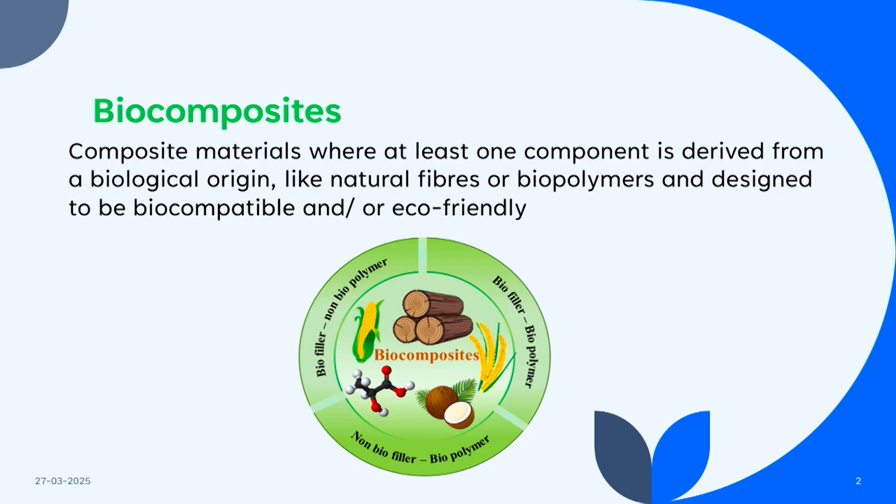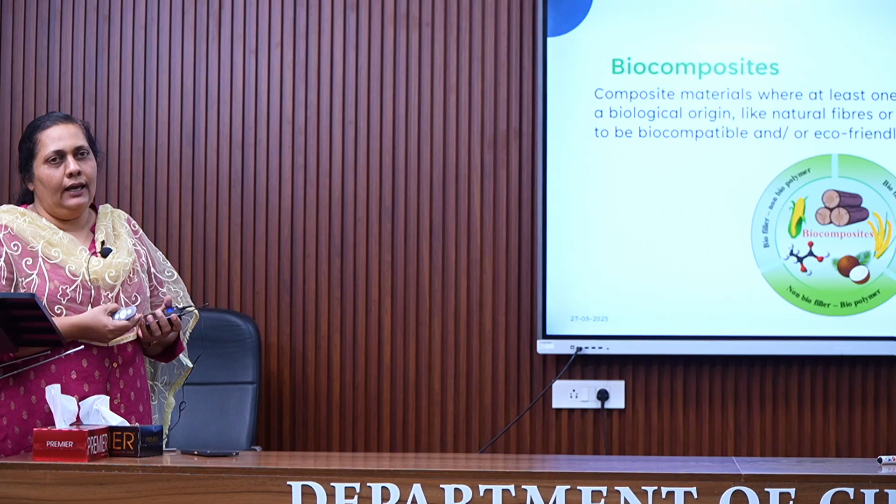This talk will be a general one, covering the basic things about adhesives and biocomposites. As you know, these days you were listening about biocomposites. Any composite material has a matrix as well as a fiber. So a biocomposite can be a biofiller and a non-biopolymer, or a biofiller and a biopolymer, or a non-biofiller and a biopolymer. So either the matrix should be of natural origin, or the fiber should be of natural origin.

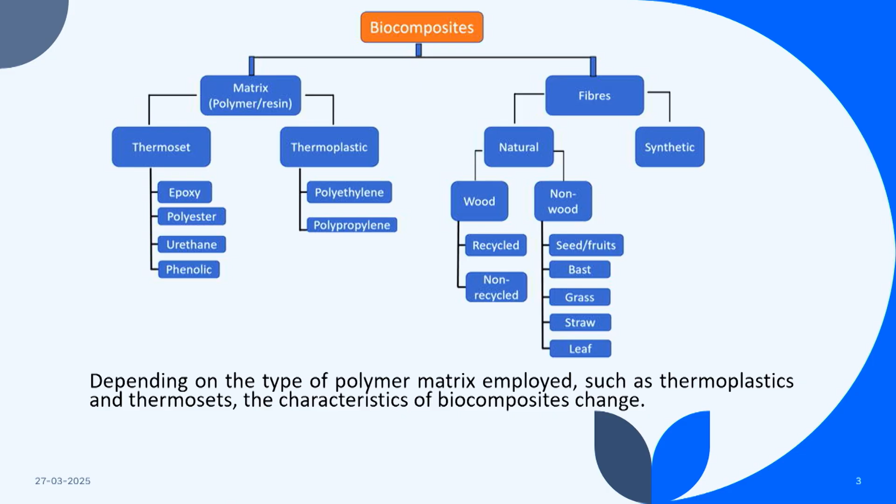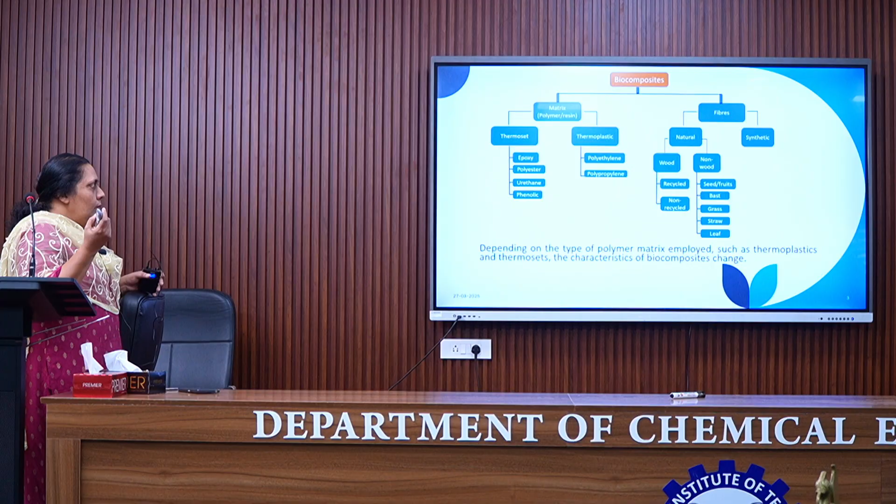Based on this general classification, biocomposites can be classified based on matrix into thermosets and thermoplastics. Thermosets include epoxy, polyester, urethane, phenolic resins, etc., while thermoplastics include polyethylene and polypropylene. Fibers can be either natural or synthetic; synthetic ones like nylon, polyester, etc., can also be used. All this broadly comes under biocomposites. Depending on the type of polymer matrix employed, such as thermosets or thermoplastics, the characteristics of the biocomposite will change.

So we have a biocomposite, and inside that a filler should be there. The filler has to be adhered properly to the matrix. So what is adhesion? Adhesion is the attraction process between dissimilar surfaces that cling to one another. The opposite is cohesion. Cohesion is when two similar materials cling, and adhesion means when two dissimilar surfaces cling together.

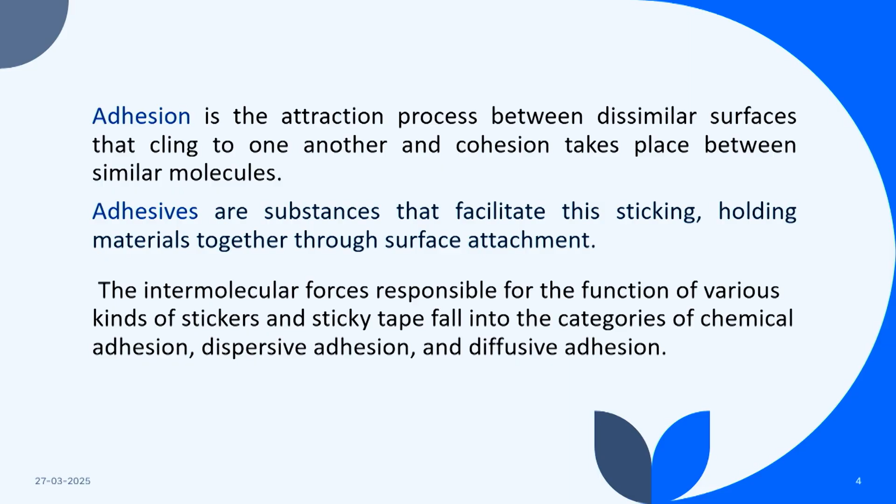Materials that show adhesion are known as adhesives, and adhesives are substances that facilitate sticking, holding materials together through surface attachment. The intermolecular forces responsible for the function of various kinds of stickers and sticky tape come under chemical adhesion, dispersive adhesion or diffusive adhesion. So there are different mechanisms by which these two materials will adhere together. We will see what the mechanisms of adhesion are.

The important theories of adhesion are physical adsorption, chemical bonding, diffusion theory, electrostatic theory, or mechanical interlocking. We will see each of them. Physical adsorption theory means there is contact between two materials on the surface, and van der Waals forces of attraction hold the adherend and the adhesive together. For these forces to develop and give good bonding, intimate molecular contact should be there between the adhesive and the adherend.

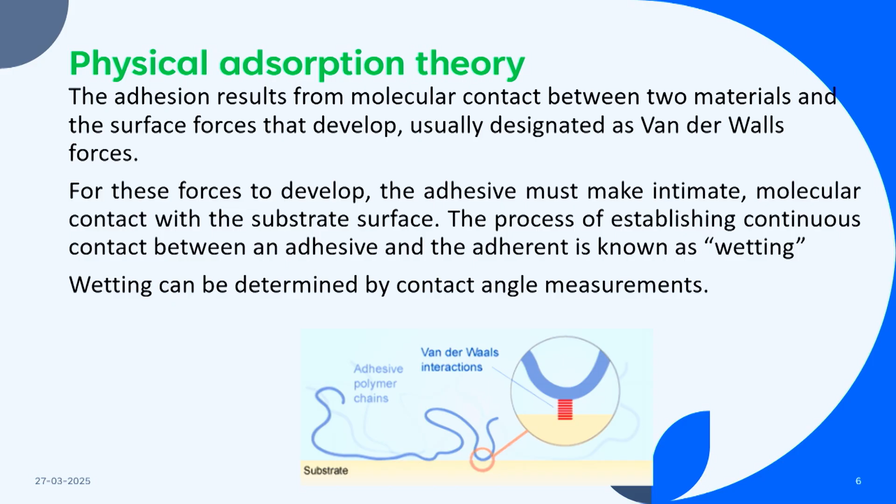That is, proper wetting should be there on the surface. Wetting can be determined by contact angle measurements. You can see here the adhesive chain shown by the blue line, and van der Waals interaction is happening at this interface. So that is physical adsorption. So wetting should be there.

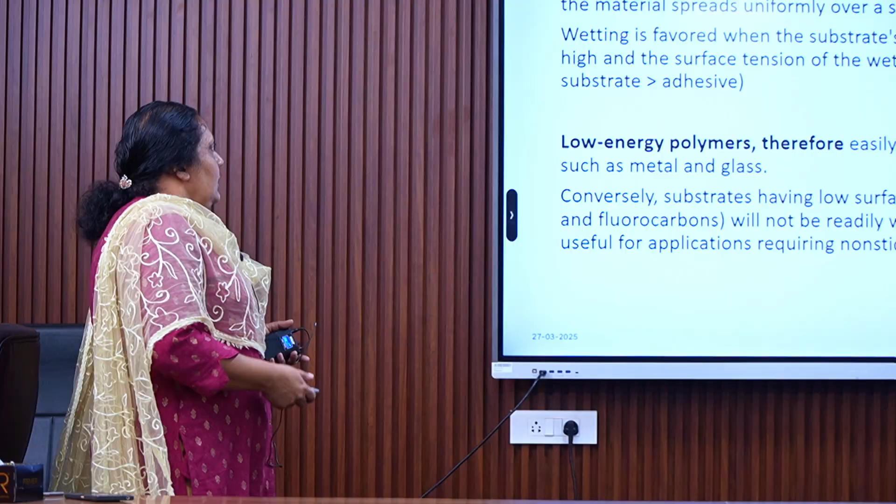So what is wetting? Complete spontaneous wetting occurs depending on the contact angle, which you may be familiar with. That is, when a drop of fluid falls on the surface, what angle it makes with the surface. When the contact angle is 0 degrees, the material will spread uniformly over the surface and form a thin sheet. That we call complete spontaneous wetting.

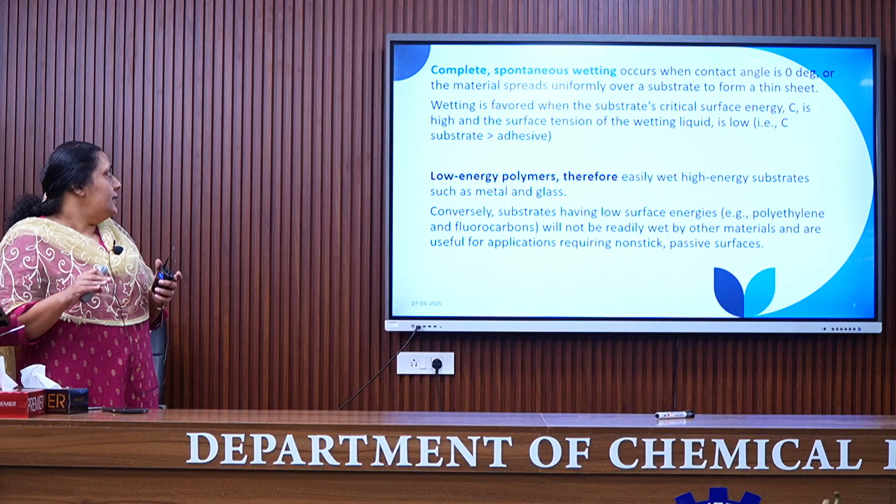So how is it possible? How can we have a 0 contact angle? When the substrate energy, that is the critical surface energy of the substrate, is high compared to the adhesive, that is compared to the surface tension of the wetting liquid, it favors the wetting process, that is, C of substrate should be greater than the C of adhesive.

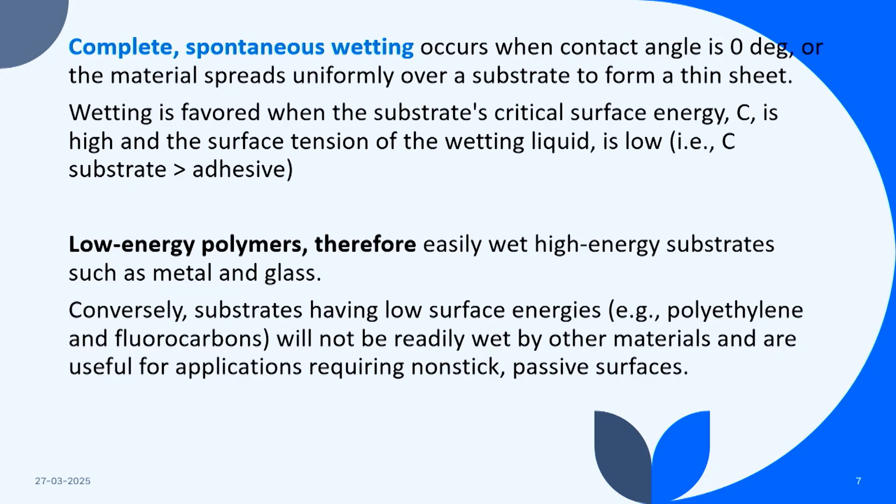So we can say that low energy polymers easily wet high energy substrates. If the substrate is having higher energy, the low energy polymers can wet it. But few substrates with low surface energy, like polyethylene or Teflon, fluorocarbons, etc., you know that material won't stick to them, because they are having low surface energy, and it is difficult for a higher energy thing to stick on it. So they will be primarily used for non-stick and passive surfaces. We call it as non-stick surface or passive surfaces. So in order to have a good wetting, the surface energy of the substrate should be higher.

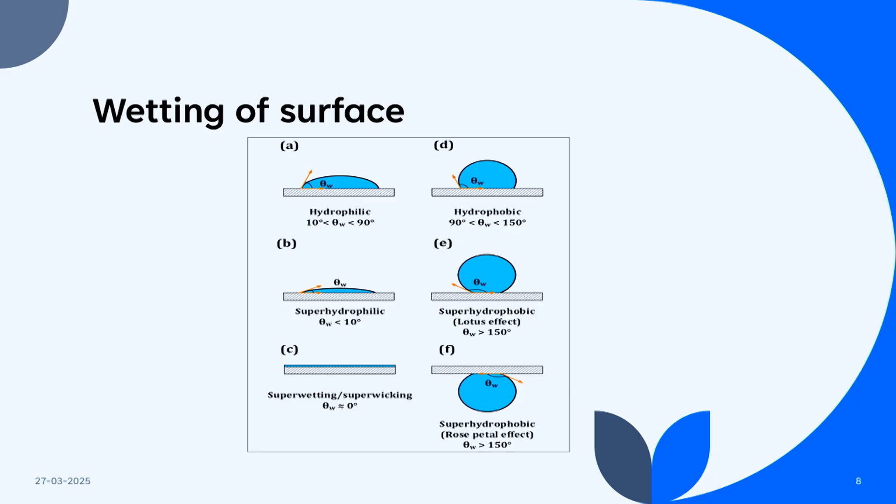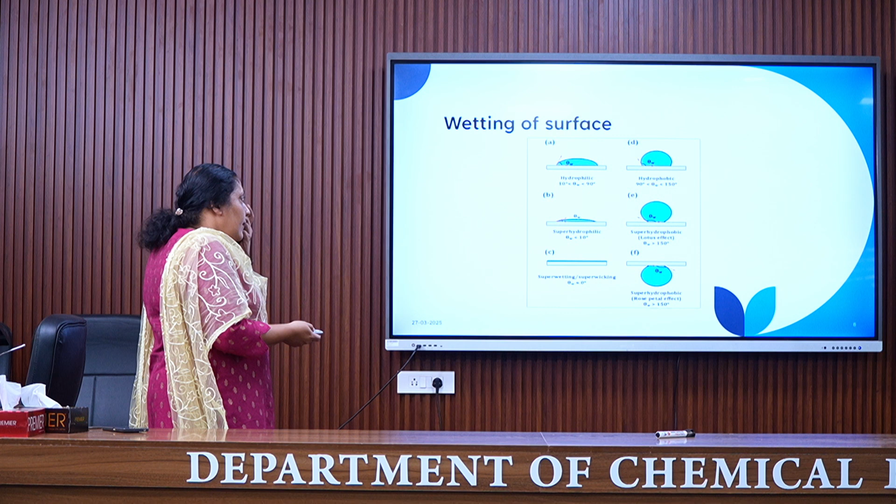So this will give you an idea of different types of wetting process. One is 0 wetting, that is super wetting or super wicking, where the contact angle is 0. Super hydrophilic is less than 10, then hydrophilic 10 to 90 degrees. And if the contact angle is between 90 to 150, hydrophobic, then super hydrophobic, rose petal effect and lotus effect. So this is how it is classified based on the contact angle, the nature of the surface.

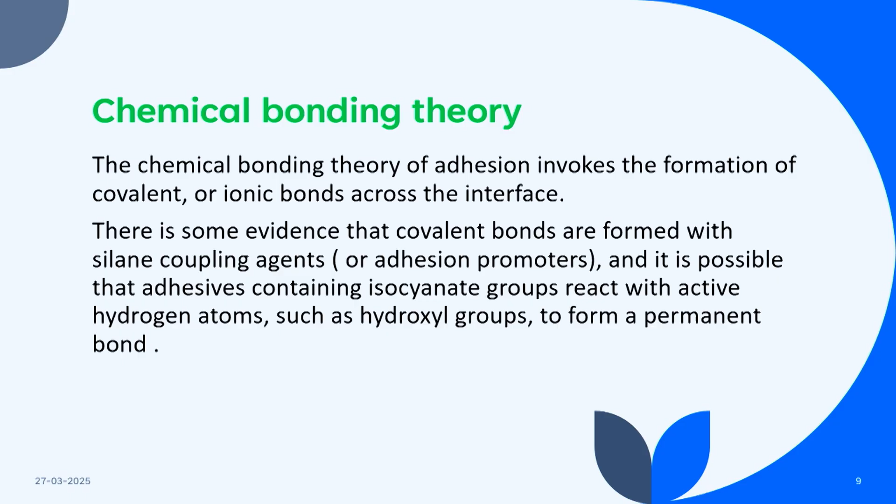So that is physical bonding. For physical bonding, a van der Waals force of attraction is required, and for that proper wetting of the surface is required. Second is chemical bonding theory. Chemical bonding theory states that an ionic bond or a covalent bond has to be formed between the adhesive and the adherent.

So we will add some silane coupling agents or adhesion promoters into the adhesive system so that it can react with the adherent and form a chemical bond between the adhesive and the adherent. Another example is some isocyanate groups can be there in the adhesive system, which can react with the hydroxyl groups present on the adherend surface. That gives a permanent bond.

Then the third one is diffusive adhesion. Diffusive adhesion means both the adherend and the adhesive should be mobile, and they should be soluble in each other. This would be particularly effective with polymer chains where one end of the molecule diffuses into the other material. That is, between adhesive and substrate, mutual interdiffusion should happen.

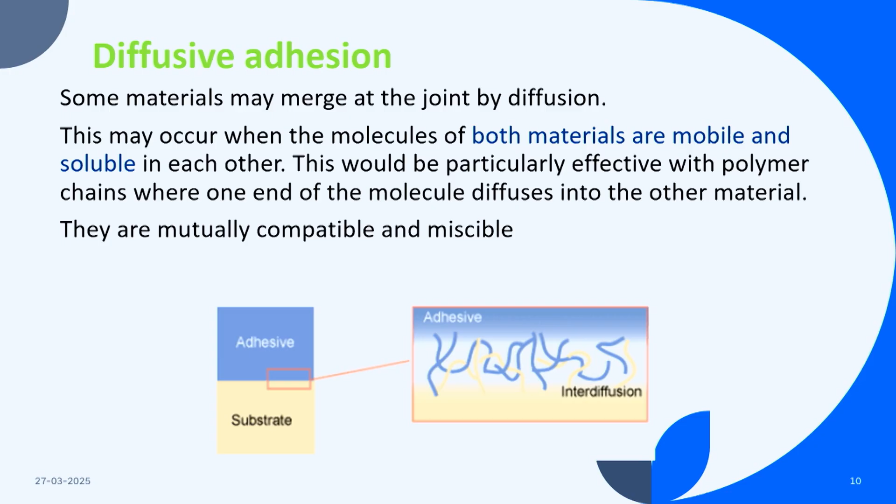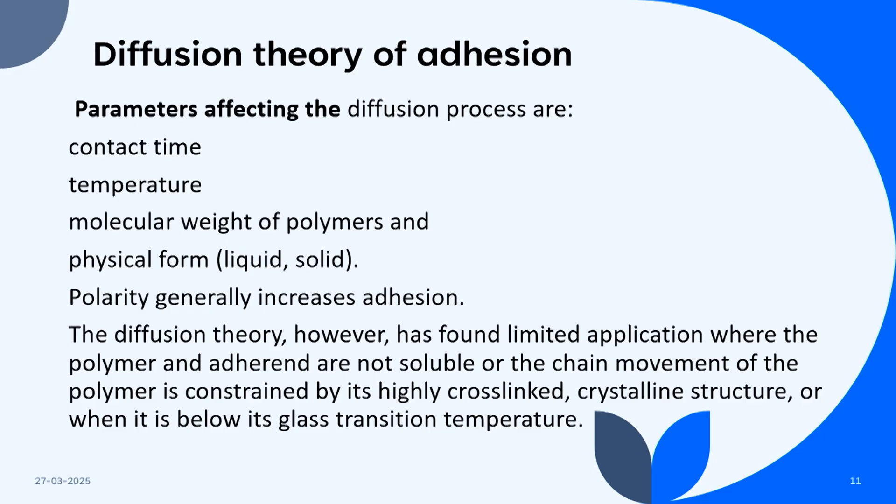So they should be mutually compatible, and the different parameters that affect this diffusion process are contact time, how long it is in contact, then temperature, molecular weight of the polymers, physical form, whether it is liquid or solid. It is observed that generally polarity increases the adhesion, and the limitation of this diffusion theory is that if the molecule is highly crystalline, or it is a long chain or high molecular weight, it won't be soluble. So diffusion theory has limited application where the polymer and adherend are not soluble, or there is no chain movement because it is constrained by its highly cross-linked crystalline structure, or when it is below its glass transition temperature.

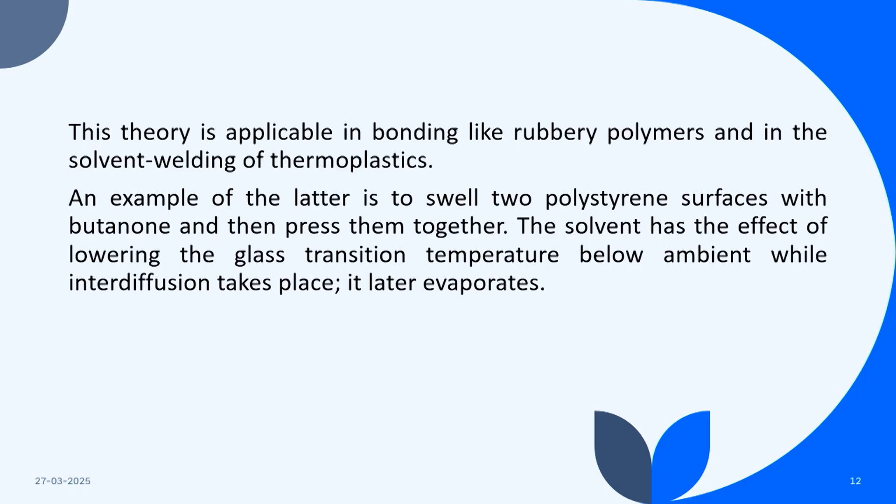When a polymer is below its glass transition temperature, it will be brittle or rigid, so in that case also diffusion adhesion is not possible. This diffusion theory is commonly seen in rubbery polymers and in the solvent welding of thermoplastics. An example is polystyrene: two polystyrene surfaces can be swelled using a butanone solvent, and then pressed together. The solvent has the effect of lowering the glass transition temperature below ambient. So interdiffusion takes place and later the solvent evaporates, so the two surfaces get adhered together.

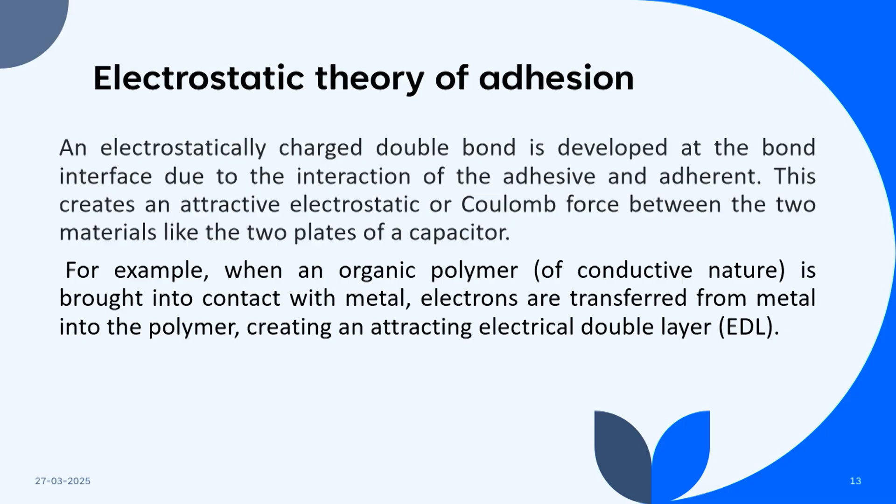Then the next theory is the electrostatic theory of adhesion. Electrostatic theory means there will be a charge developed, like in a capacitor, a plus charge and a negative charge. At the interface between the adherent and the adhesive, positive and negative electrostatic charges will be developed. So an electrostatic or Coulombic force between the two materials will bond the two surfaces, the adhesive and the adherent, together. So there will be an electrical double layer between the adhesive and the adherent. Adhesion occurs due to electrostatic forces between them, potentially involving the formation of an electrical double layer.

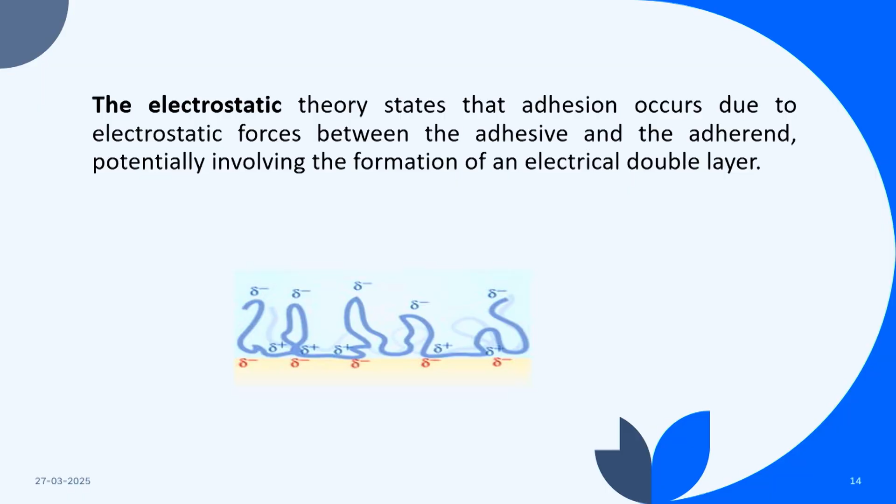You can see negative charges on the substrate and slight positive charges on this one, and those forces join them together. But normally we know polymers are insulators, so for normal insulator type polymers this theory is not that significant. While for conductive materials, this electrostatic theory can also explain the adhesion between a substrate and the adhesive.

Then the last one is mechanical adhesion. Mechanical adhesion means, when you are taking any material to join them, first we will have to do some surface treatment so that some peaks or openings, pores can be formed, and while rubbing this adhesive on the surface, these adhesives can penetrate into these holes or pores or openings, and later they will cross link and harden, and that is how the mechanical adhesion takes place.

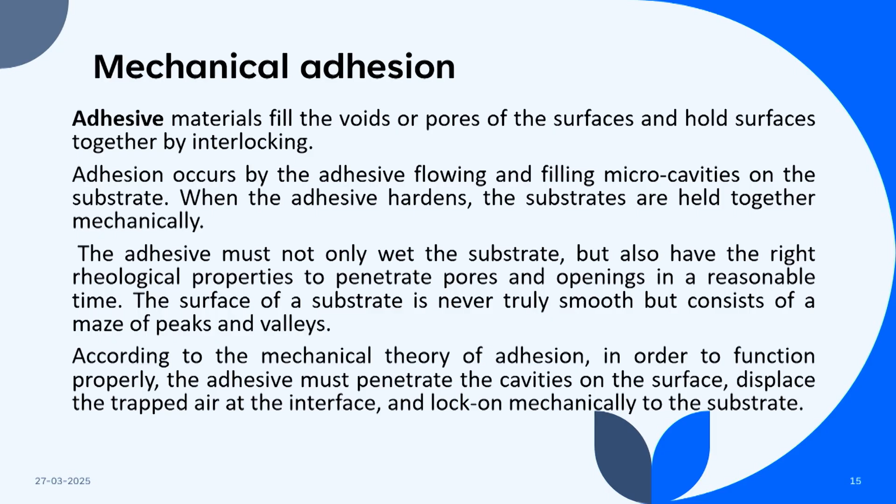So for mechanical adhesion to take place, the adhesive flows and fills micro cavities on the substrate, and when the adhesive hardens, the substrates are held together mechanically. So for mechanical adhesion, surface roughness should be there. It should not be a plain surface.

So when you are doing some surface treatment, roughening your surface gives teeth to the substrate. That is, some mechanical interlocking effects will be given, and it increases the total effective area over which the forces of adhesion can develop. So we can say it is a valley and maze like thing. But roughening is only effective if the adhesive can wet the adherend properly. So these are the main theories of adhesion: physical, chemical, electrostatic, diffusion, and mechanical interlocking.

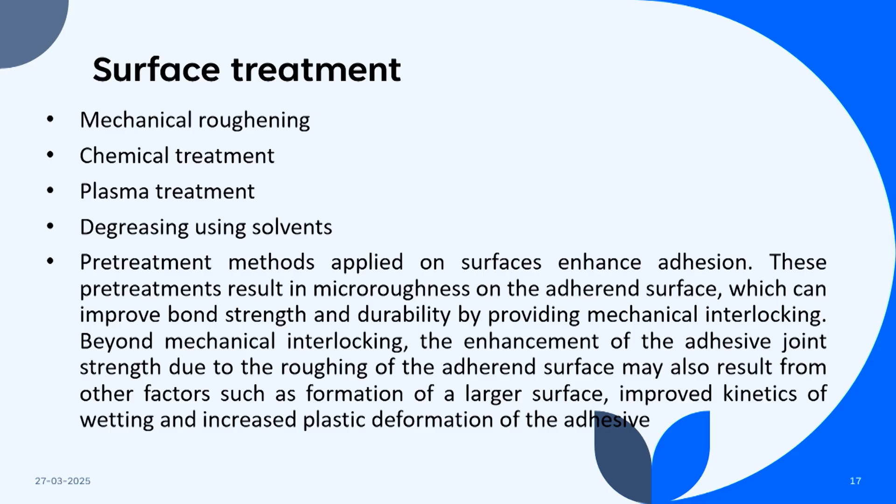So whenever you are going to apply an adhesive on the system, we have to do some surface treatment to the substrate. For mechanical roughening, you can use emery paper, rubbing with it so that the surface becomes rough, aiding the mechanical interlocking. Then we can have chemical treatment. Based on the substrate, we have to judiciously select the treatment methods, like acid etching or alkaline etching. Whenever you do a chemical treatment, immediately after that you have to clean it, with solvent wiping etc.

In some cases, even plasma treatment, ionic gases can be used for surface treatment. These are the different methods commonly practiced in industry to improve the adhesion property of the adhesives. Whatever the treatment, pre-treatment methods always enhance adhesion, producing micro roughness on the surface which can improve the bond strength and durability by providing mechanical interlocking. Enhancement of adhesive strength due to roughening of the adherend surface may also result from other factors like increased surface area, improved kinetics of wetting, and increased plastic deformation.

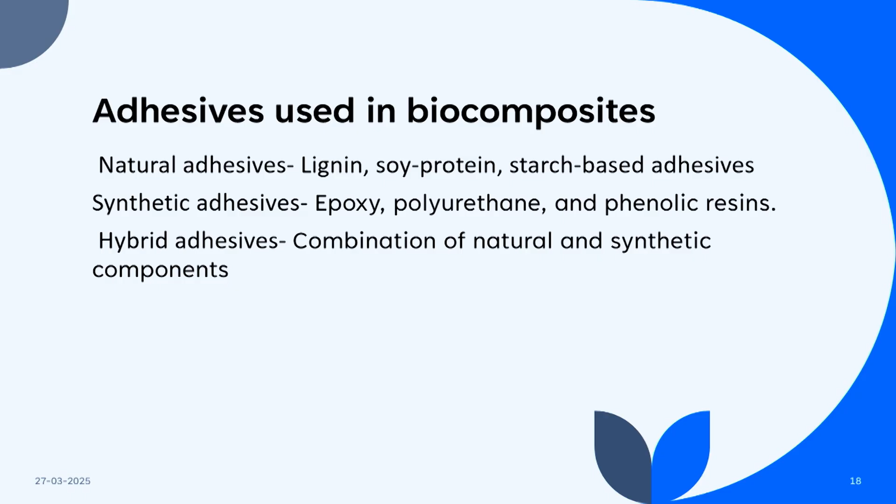So what are the normal adhesives used in biocomposites? Natural adhesives like lignin, soy protein, starch-based adhesives are a few examples. Synthetic adhesives like epoxy, polyurethane, phenolic resins can be used. Sometimes there can be a hybrid adhesive, a combination of natural and synthetic, but more often a combination of two different chemistries, like epoxy and acrylates used together. So either natural, synthetic, or hybrid adhesives can be used.

And what are the factors that generally affect the adhesive properties? One, the fiber matrix interface plays a crucial role in adhesive performance; we'll see that in the coming slides. Moisture content: the presence of moisture will promote degradation in adhesives. Temperature: if it goes below the Tg, the glass transition temperature, the properties expected from the system can be different.

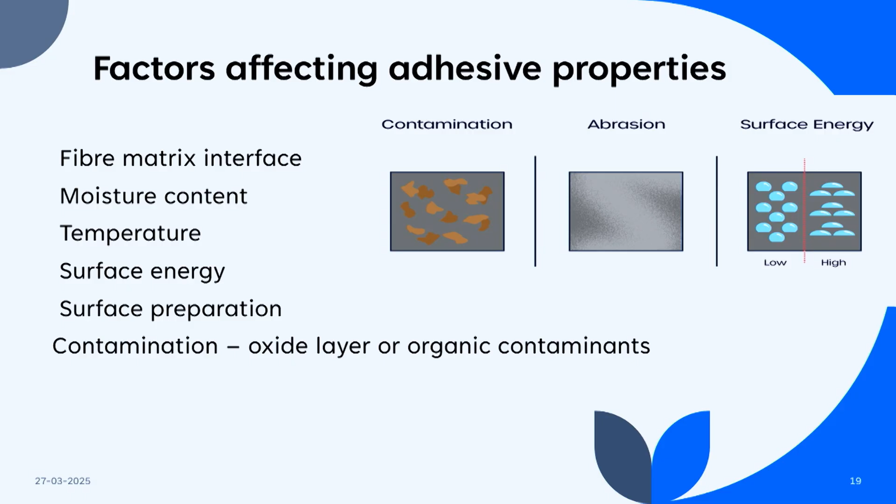And surface energy, as we told earlier, plays a crucial role in selecting the substrates and surface preparation. It is also reported that contamination, an oxide layer or organic contaminants present on the surface of these adherends, will affect adhesion. So simply removing them, that is mechanical roughening and removing this oxide layer or organic contaminants, itself increases the adhesive property to a higher level.

So you can see an abraded surface in that second picture, that is, we are abrading using some emery paper; surface energy low, high, and contamination. And how can you test these adhesives?

So for adhesives, a common test is the shear test, which is done as per ASTM D1002. It measures the shear strength of adhesives, that is, one part will be sheared off. And the peel test, either a 180-degree peel test or a T-peel test, evaluates the adhesive strength in peel mode.

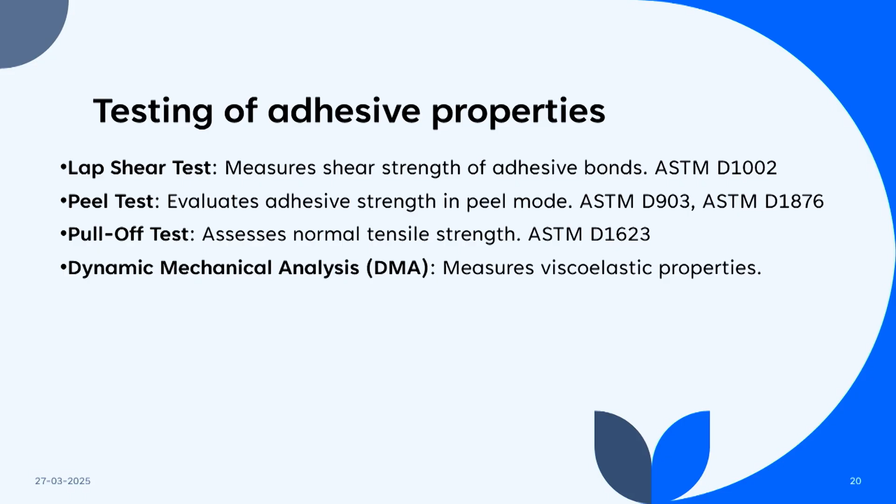Generally adhesives will be less strong in the peel test, while they show higher values for lap shear stress. It is done as per ASTM D903 or ASTM D1876. Then there is the pull-off test, which assesses the normal tensile strength of the adhesive. And, as you heard in the previous lecture, dynamic mechanical analysis measures the viscoelastic properties of the adhesives.

And how will you classify these adhesive failures? We know that in service these will fail, and the failure can be of three types. The first is adhesive failure or interface failure, which occurs when there is minimal adhesion on one or both sides of the bonding surface.

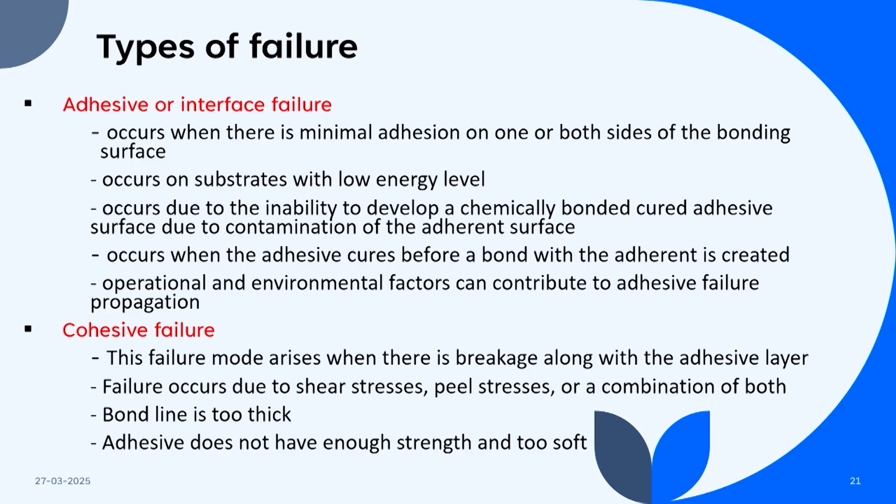And substrate or adherend failure means the substrate fails. Adhesive or interface failure occurs when there is minimal adhesion on one or both sides of the bonding surface. It is generally observed on low surface energy surfaces, because proper bonding does not happen between the adhesive and the surface. So it is easily separated, and it occurs due to the inability to develop a chemical bond between the adhesive and the substrate.

It can also happen when the adhesive cures before a bond is established. If the adhesive cures before a bond forms between the adhesive and the adherend, adhesion failure can occur, because there is no bond formation between them. Operational and environmental factors can also contribute to adhesive failure propagation. Next is cohesive failure.

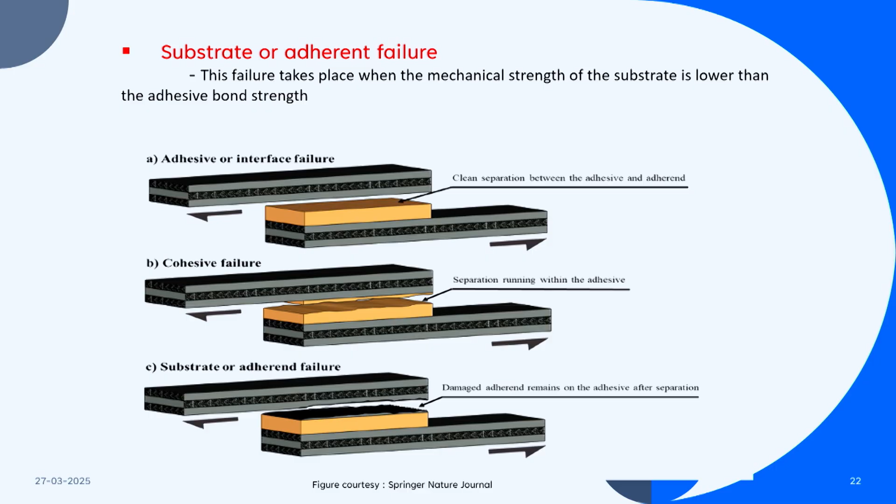Substrate or adherend failure occurs when the mechanical strength of the substrate is lower than the adhesive bond strength. That clearly tells you this adhesive system is not suitable for that substrate, so you have to change the adhesive or change the substrate.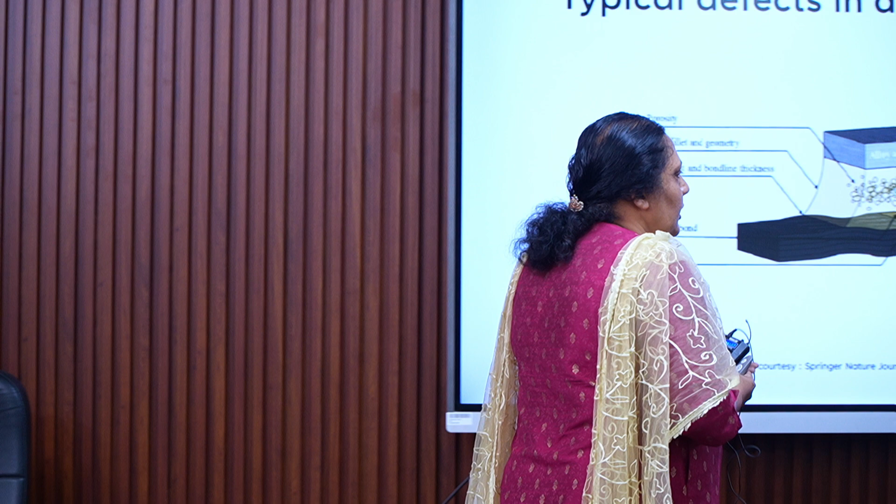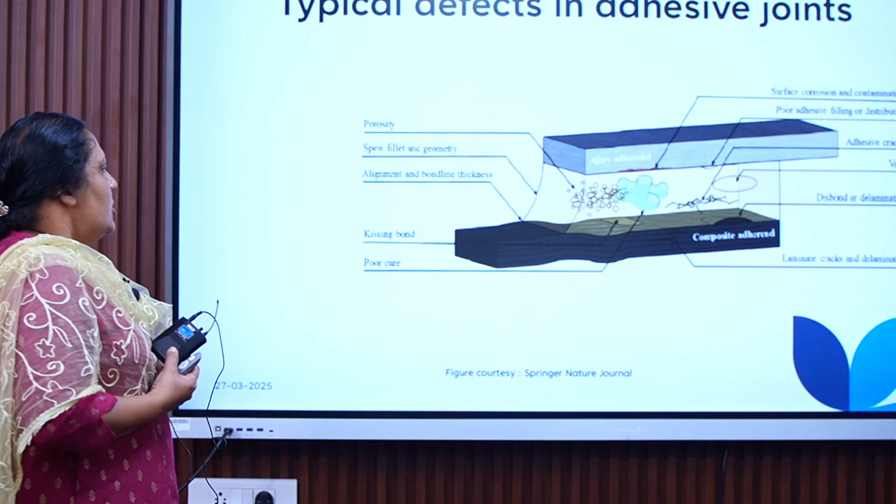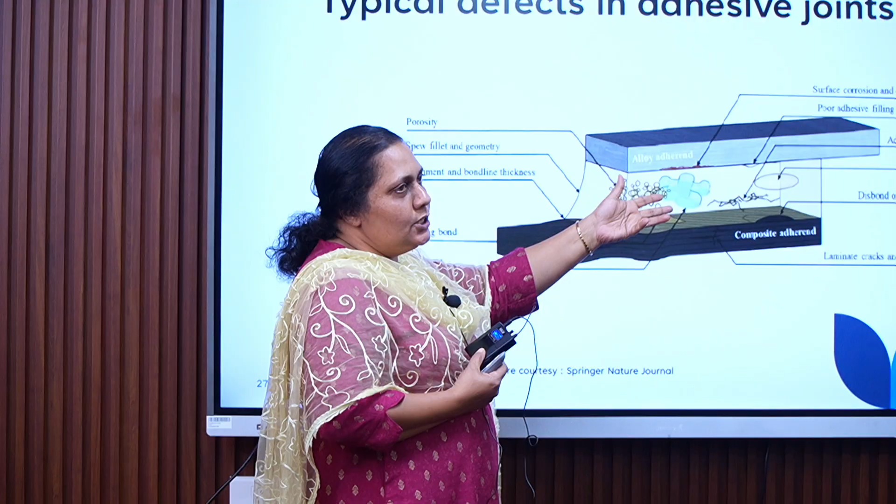So that type of defect, we call it a kissing bond effect. Or we can have debond or delamination. After peeling off, you can see that some part of the adhesive is coming out, or the debonding or delamination is happening. Otherwise, it can happen with poor curing. That is, as we mentioned earlier, the adhesive is not cured properly, so it is soft and it has not attained the proper strength. So poor curing is another thing.

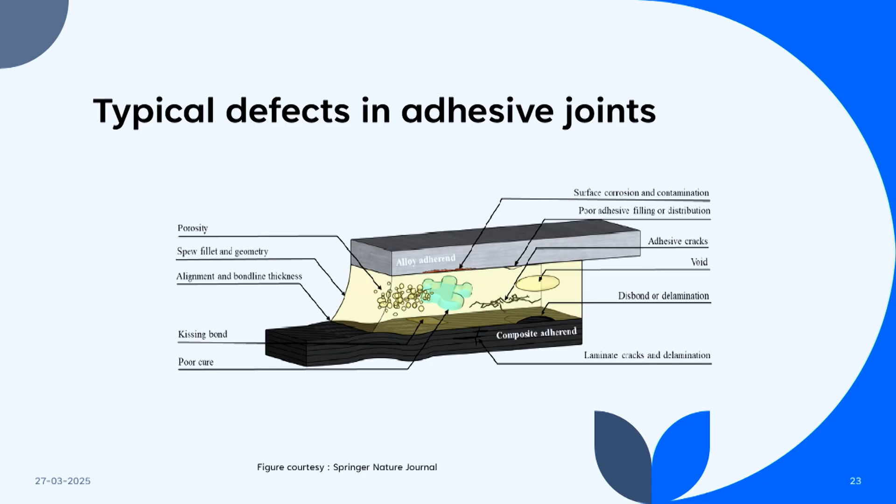Then this is spew fillet and geometry. That is how this adhesive behaves. When you are pasting this, if there is a geometrical change or a spew fillet, like there is an angle or it is not uniformly filled, there will be stress concentration, and that can act as a defect. Then if some cracks are there in the adhesive, that can act as a defect in the adhesives.

And another thing is that some chemical reactions are happening. So if some molecules like water molecules or small molecules are evolving, and you are not giving enough time to remove that from the system, that will cause small voids or pores inside this adhesive layer. And also porosity of the adhesives can be there, like the solvent is not escaped properly. During the curing, the solvent will escape, and in that region porosity can happen.

And surface corrosion, that is based on the adherend performance. If the surface is corroding after some time, that can also act as a weak point where the adhesive will fail. And poor adhesive filling, that is distribution of the adhesive on the surface of the substrate, can also act as one. So altogether these are a few mechanisms by which adhesive joints fail under service or during testing. These are the reasons.

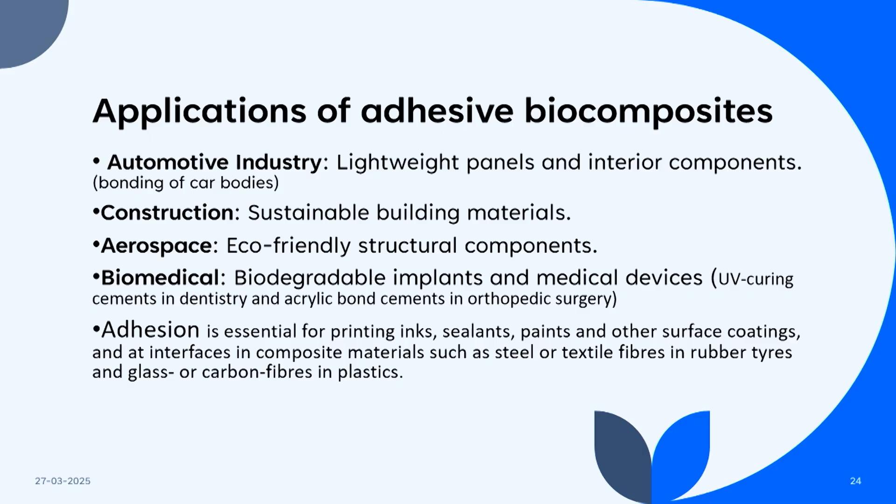And coming to the application of biocomposites, you may be hearing about this for the past 1 week. It is used in the automotive industry: lightweight panels, bonding of car bodies, many things are happening now. And even my research group, Dr. Habib is here, they are developing some undercoat applications based on polyester resin. Then in construction, sustainable building materials can be prepared using biocomposites. Then aerospace eco-friendly structural components are there. Then the most familiar is biomedical application: UV curing cements in dentistry and acrylic bone cements in orthopedic surgery. So biocomposites find application in all these different things.

And apart from acting as an adhesive, adhesion is essential for printing ink, painting and other surface coatings. In the rubber tire industry, there should be proper adhesion between the steel and the rubber. And also in glass or carbon fiber in plastic composites, apart from the adhesive joining two things together, the property of adhesion is essential in all these applications.

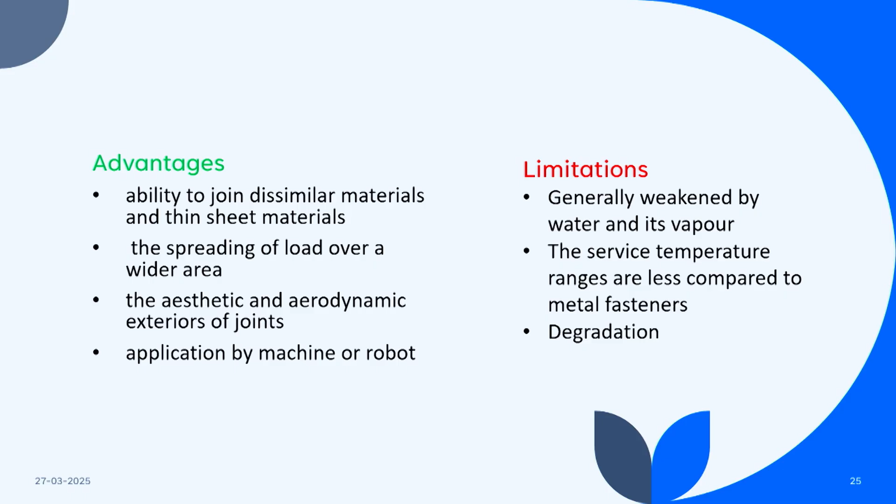So what are the advantages of adhesive joints? They can join dissimilar materials, and thin sheet materials can also be joined, while mechanical fastening will be difficult in very thin sheet materials. And spreading of load over a wide area is possible. And aesthetic and aerodynamic exterior joints, any shape, you can join using adhesives. And now mechanized coating is there; application by machines or robots is possible.

But the limitation is that generally it is weakened by water and its vapor, because most adhesives will be exposed to the environment, where water is there. So water and its vapor can degrade these adhesives. And the service temperature: mechanical fasteners, nuts and screws, can be used for a wide range of temperature, but there is a limitation for polymeric adhesives. The operation temperature should be within specific limits based on what type of adhesives or polymers we are using, and degradation. So these are the limitations.